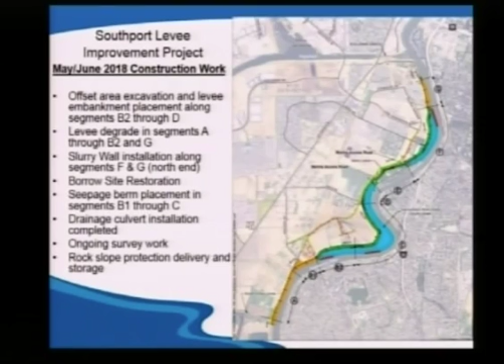We are currently trucking in some rock slope protection. At our breaches, as well as a couple erosion sites, we have quite a bit of rock that's going to be going in. If you drive along Village Parkway, just south of Davis Road, you'll see a mountain of rock there — that's what that's going to be used for.

So I'll go ahead and run you through some pictures going south to north. This is segment A, the levee degrade. This is where slurry wall will start, probably in the next 3 to 4 weeks, once ACE gets finished in the north. But in this picture, you can see the material that's been removed along the slopes to about the elevation where the degrade is going to go.

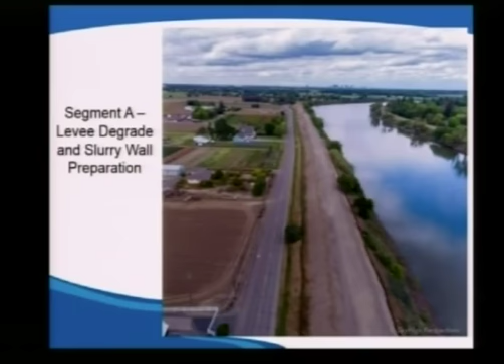Like I said, they currently got the excavator out there getting some of that material down to grade. So it looks quite a bit different than what you see right now with a wider platform.

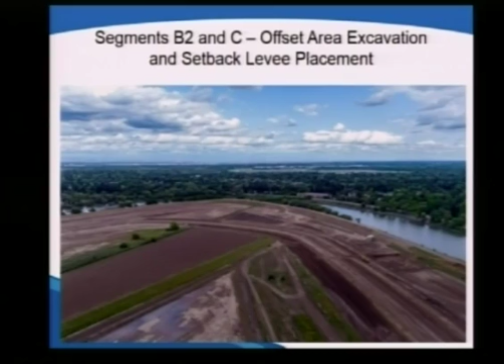Segments B2 and C, here's where we have some of our offset area excavation, as well as where a majority of the levee embankment is currently going. In the following picture, I've got better pictures of those excavations. You'll see on the right-hand side, as well as in the middle, some of the darker color dirt - that's where the excavations are currently going on. These were taken end of last month, so in the 2.5 weeks since then, we've moved quite a bit more dirt. Hopefully the pictures I'll show you next month will show how those areas have grown. That material is used in combination with the embankment down along the sides for the setback levee, as well as the seepage berm, and some of the borrow restoration.

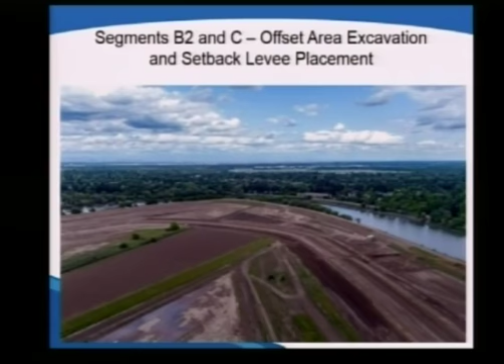This is looking northwards towards the marinas with downtown Sacramento in the background. This is segments D and E. We've got some offset area excavation happening in here. That rock pile I was talking about is right down there to the left-hand side. They've got about 30% of the material out there right now, so we have quite a bit to expand on that - you'll see that continue to grow over the coming weeks.

We've got some setback levee embankment work going in the vicinity of the Sherwood Marina. That's our secondary access from Village Parkway to feed those folks. Right now they're all coming off Yacht Club, but that'll continue to get installed, and then probably the next 4 to 5 weeks be in use or ready for use.

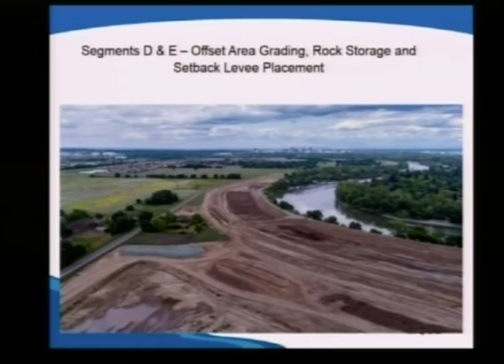This is looking south. This is the segment FG tie-in at the very north end of the project. We did mainly setback levee and platform work along here to get ready for the slurry wall. So it's about elevation 22, 23 in preparation for that. That's the first area they're looking to start the slurry wall work in, and they've got about 2 to 3 weeks set for that work.

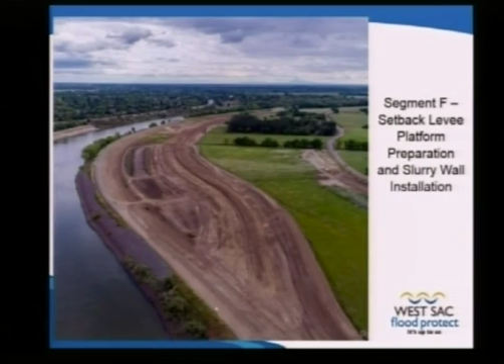We haven't touched the levee in any of this particular area south of our breach, and we'll continue to monitor construction going forward to make sure that we keep the adequate level of flood protection our agencies are looking into.

I'll go back one. The one I skipped is the very northernmost end, segment G. This is where the DMM rig is currently being constructed, and we're looking to start drilling probably on Thursday. That's essentially where the wall is getting mixed in place with those augers that'll be on that drill rig. They've got some of the platform already ready to go, as well as some of that cap that goes along there. But this will tie into the existing wall that currently exists in the north end, and ultimately we'll tie this into the slurry wall that Inquip's working on. This is the northernmost segment of the project, and we start later this week.

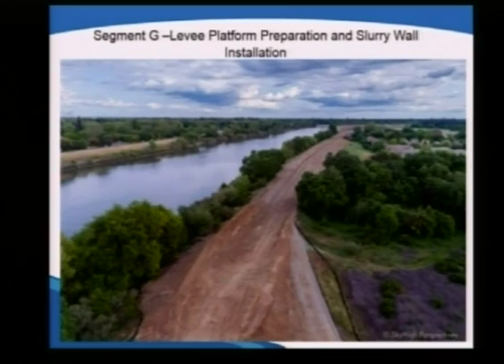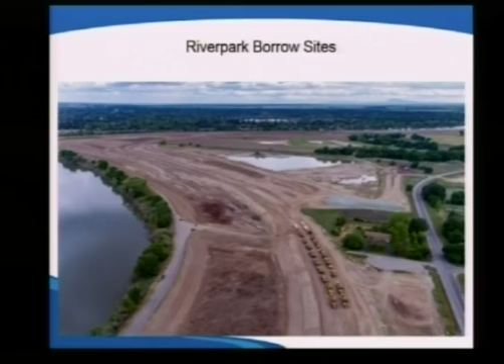This picture shows the borrow sites, but also some of the equipment lineup we have over here. Borrow A4, which has some of that standing water you see in the background, is one of the areas we're currently backfilling and restoring. A3, which is just on top of that, is where some clay blending is still occurring - that's the core material we use along the levee. And then A1, which you can't see too well over here, but that would be to the far right - that's one of the areas that's also being restored. The amount of equipment we have out here is quite a bit more than what you see over here. Hopefully with the next update we'll see some of that equipment in motion, as well as get a better idea of how many pieces we have out there. But we are in full production mode.

We're moving about 12 to 15,000 cubic yards a day. We're surveying that information to verify what those numbers are, and we'll continue to move forward in that respect and update our construction team as well as our agencies as we move forward.

Is that standing water? Is that the water table? No, that's kind of the standing water just in the area over there in A4. It's more perched surface water than groundwater, anything else. Right now, depending on where you're at within the project, groundwater is anywhere from elevation 8 to 10.

So we've been able to do our excavations in the offset areas fairly easily with the excavators and trucking they're currently using. Most of it's down to elevation 10, so once they start digging the low flow channel, we'll have a better idea of what equipment can run down there. We've been pretty successful so far with not having to dewater, and as the river stays low and we move into the drier months, I think we'll be in a good spot moving forward.

Ken, elevation 10 is pretty close to the bottom of the low elevation in the offset area, with the exception of the low flow drainage canals, correct? Correct, and it continues to go down as we get further into the season. It'll essentially reach a plateau as we move forward, but we haven't run into that yet. Some of the excavations we've over-excavated to find groundwater and monitor it, and it's continued to get lower as we've gone through the construction season. I think we're sitting in a good spot right now. It's just a matter of how much dirt they can move.